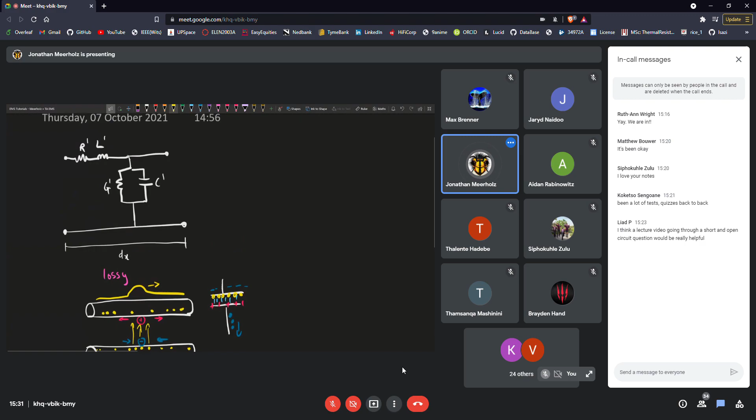Yes, we can. Okay, so there's an interaction between the two wires, which is an electric field, which is kind of exactly what a capacitor does. If you have two conductors like this, a capacitor is a storage of electrons. On the one side, it will become very negative. And on the other side, this will repel away the electrons, so this side will become positive. So that's what happens in a transmission line, and that's what this capacitor describes, that sort of behavior.

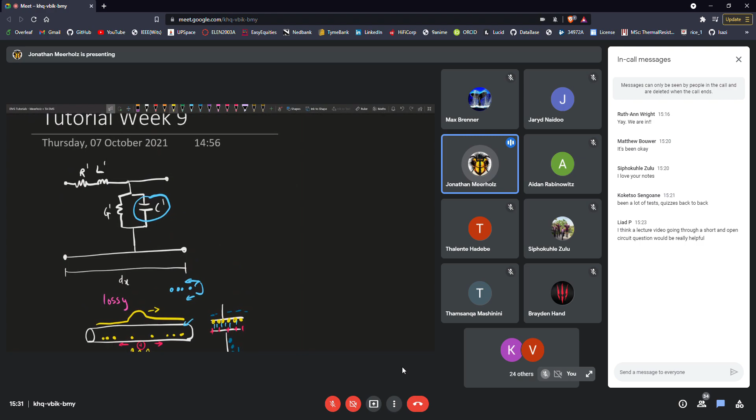When the electrons are moving, they'll make a magnetic field that opposes it. And the degree to which that happens is governed by an inductance. Okay. Then we also have a loss.

Wait, sorry, there's lots of people being noisy and calling dogs.

We have a loss, just normal losses of conductors. When electrons are traveling, they encounter resistance and dissipate heat like this. Some heat's coming off. That's what this resistor signifies. And then there's this conductance, the G, which is kind of like if you have a dielectric. A dielectric is just something that separates.

It's like insulated in a way. So it's the opposite of a conductor, but it actually polarizes. So it becomes positive and negative, and that has an effect on the electric field. Now, if your dielectric's not perfect, what will actually happen is that you'll get a loss with the electric field

as it travels. Okay, so should I get a photo of an actual transmission line? Maybe I should do that. Well, no, we don't even need a photo. If you see even in your normal twisted cables, like earphones, you'll see there's kind of stuff in between it. That's kind of a dielectric. But in power cables, it's way more prominent.

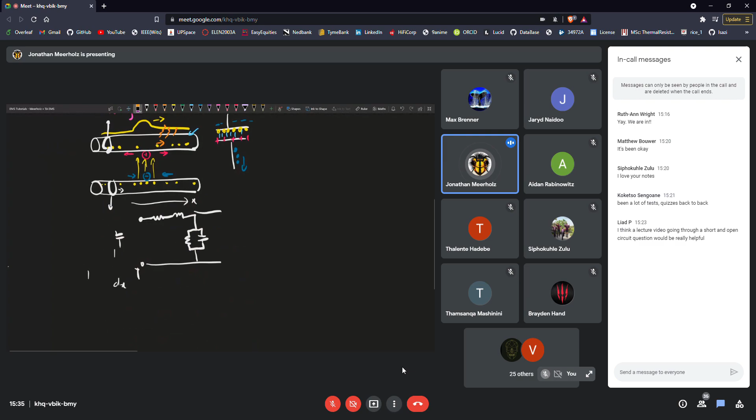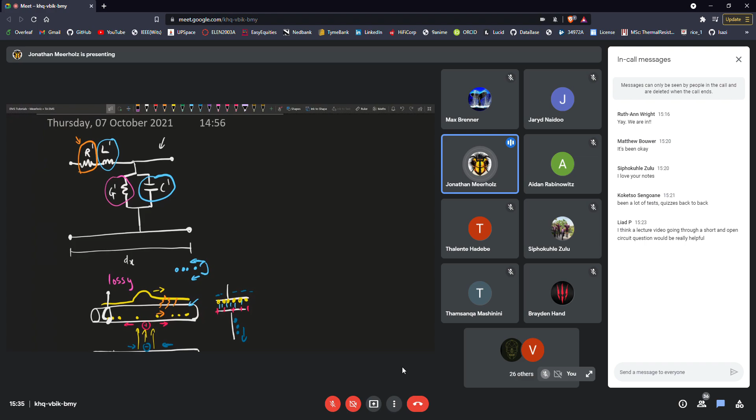So let me just slow down because I've said a whole lot of things really quickly here. Are we all okay with the concepts of what the circuit is representing? Can we see that it's also an infinitesimal length? So when I say R dash, that means the resistance

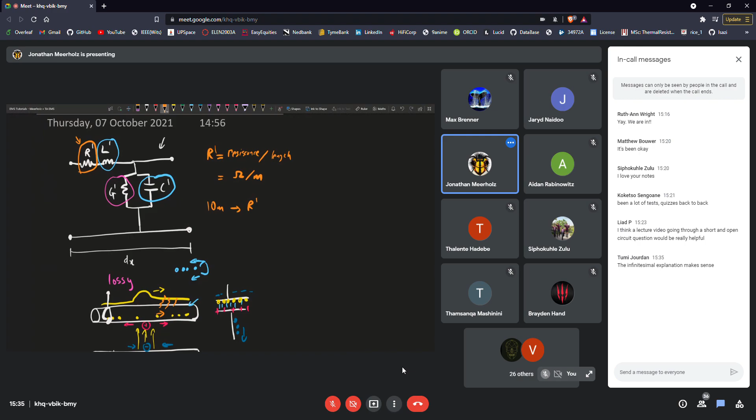So it's like a metric that you give to a transmission line. If your transmission line is 10 meters long, and the R dash is, let's say, 10 ohms per meter, then your total resistance will be 100 ohms. So in the equivalent circuit, you're actually dealing with the per length measurement. So that's the infinitesimal thing.

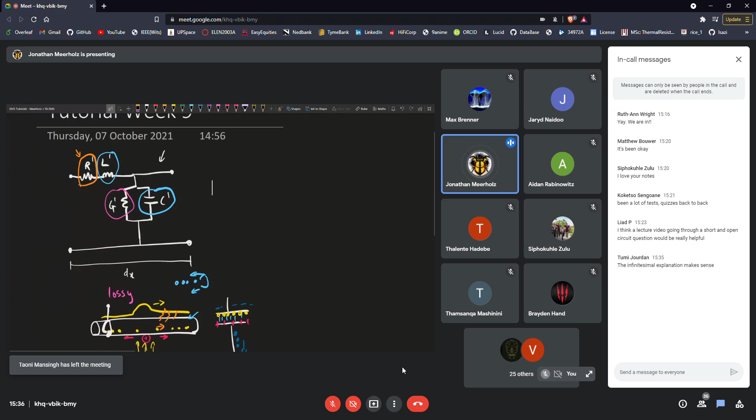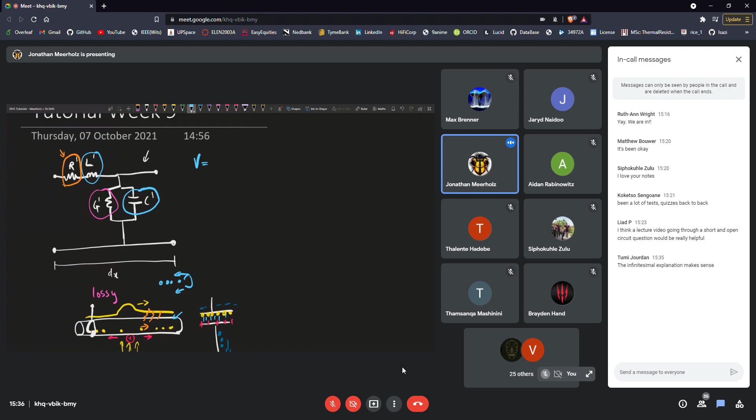So now when you piece lots of them together, basically in normal circuits we have no understanding of spatial dimension. We don't explain anything over space. There's no propagation speed. We do, however, have V is equal to L di/dt, and I is equal to C dv/dt.

These are the equations for an inductor and a capacitor, and they give us a time relationship. If you just had a normal resistive circuit, a voltage source and a resistor, and we graph voltage over time, you'd see that it would stay a constant height.

It wouldn't change. But if instead of a resistor we have a capacitor, well, let's put a resistor with it so you get a little RC circuit, and you solve the differential equation. For voltage, it's going to store voltage, so it's going to increase like this, and the current will do kind of the reverse. That'll be the current.

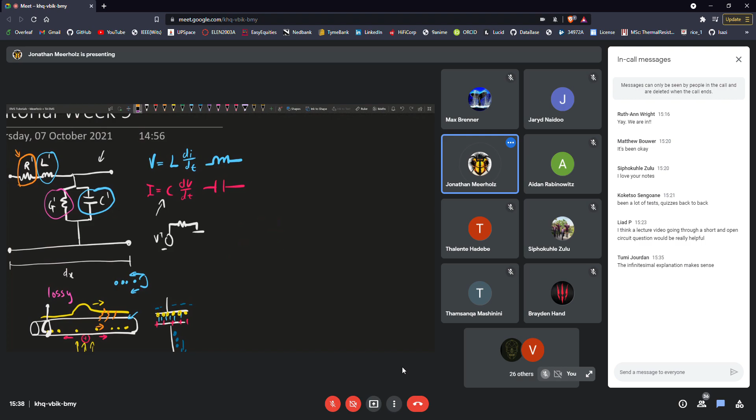So in time, current and voltage change because of these derivatives. But there's no understanding of distance. There's no length, no propagation speed, but there is a transient behavior. But now by explaining that we have an infinitesimal piece, we can actually integrate that over length.

So now we have sort of a length, and we have transient behavior happening along that length. Now suddenly, because things are changing in time and in distance, we actually get a propagation speed. So we have one little small circuit here; the change across here takes time, and it will then change to the next one, which will also take time, and to the next one, which will take time. And thus we have propagation down this line.

So that's the whole point of this section: in circuits there's no propagation speed, we assume it to be instantaneous. It's one of the assumptions of circuit theory, because circuit theory is actually an approximation, even though you've never considered it, but it's a very useful approximation where you just say that things bounce around and become stable. Now we're actually going to say that things take time to travel. And that's what this reflection diagram you've been seeing is explaining, the transient behavior. You will not get that from circuit theory by itself without considering the traveling electromagnetic wave.

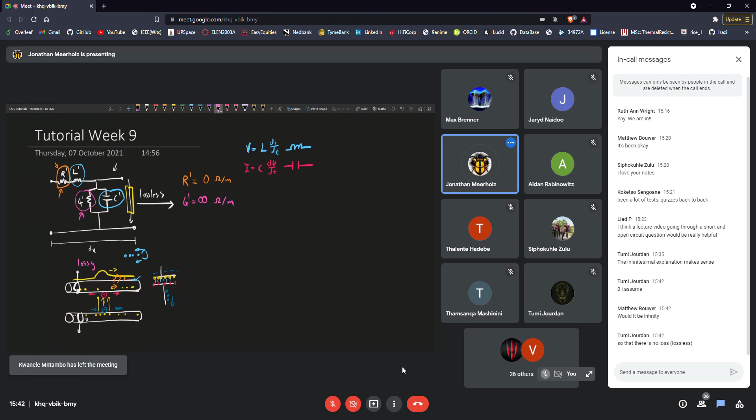If we have a circuit like this, we're just going to do the capacitor and the resistor. Remember, if current is flowing through this branch, that's considered a loss, if we have an insulator and current is actually flowing through it. Yes, you were wrong, but it is such an easy mistake to make. And you'll see in the equations that they say G prime is equal to 0. But what they're actually speaking about is Siemens per meter, because remember, that's the conductance. If you go 1 over R, which in the units is 1 over ohm, then you get Siemens.

So then that must go to 0. The conductance must go to 0. Okay, the actual value, if they ask what is the value in ohms, it must go to infinity. The reason why is because if it's infinity, what do we have? We have an open circuit. Nothing can flow. There can be no loss.

You want energy to propagate down the line, not through the dielectric. It's just a symbol, so it's not the classical sort of resistor that you use on your board, but it's that sort of concept. Okay, so that's something I really wanted to point out, so you guys don't get confused. If they're asking ohms, infinity. If they ask for Siemens, 0 to make it lossless.

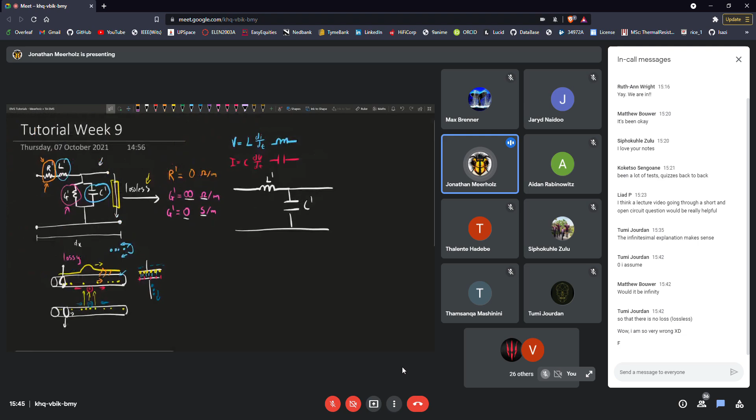Does that make sense? That means we get left with this. We just get our time variation components for a lossless one. There's no loss. Then we just have a C per length, and then an inductance per length. And this is our lossless transmission line. Okay, so there we go. That was the start. That's how you get your lossless one.

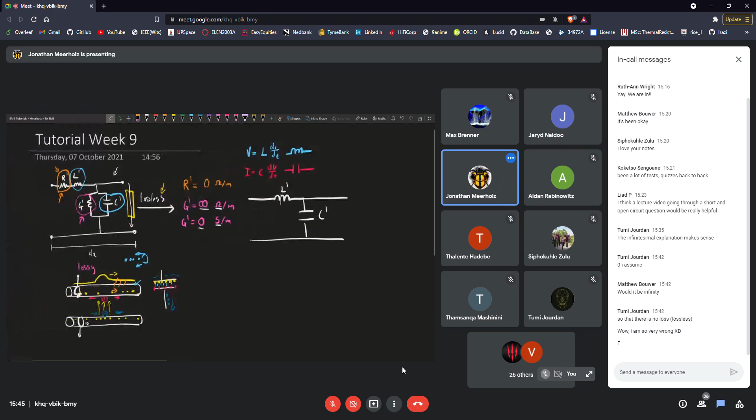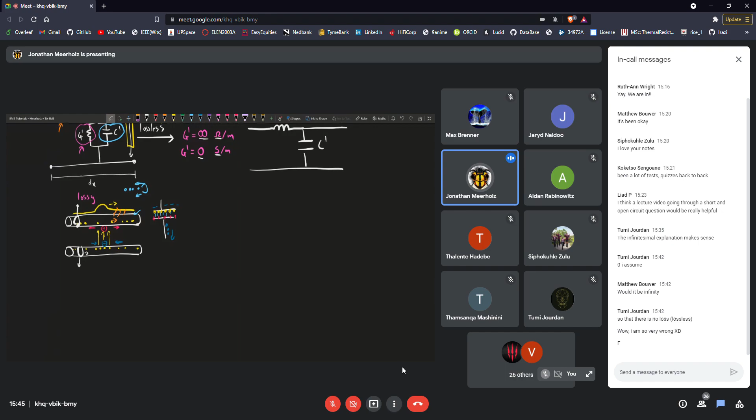But I don't continue explaining, but it's already like quarter to, and we haven't even started. But quickly, sorry, I'm babbling, but are there any questions on this? I'm going to briefly pause for you guys to ask. Let's see. Okay. Are we in understanding? I'm going to assume understanding. Quickly ask. Okay. So there we go.

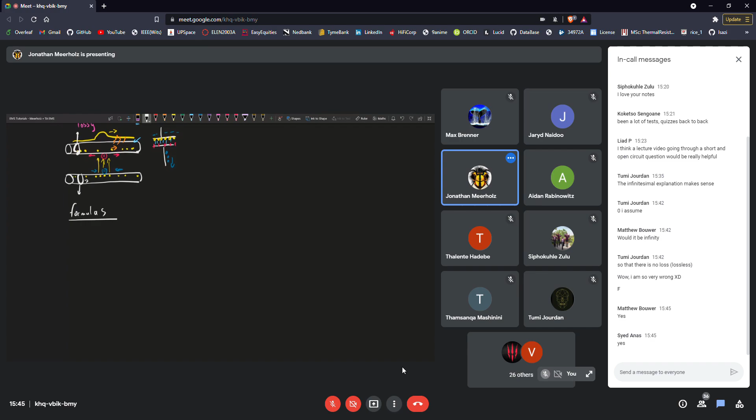Now, we're going to look at our equations. We're going to start with characteristic impedance, which they give with a Z. Okay, let's give this a context. Did you see over here that there was a sort of squishiness? How much capacitance you had, and then there was kind of a resistance with the magnetic field time delay with the inductance. Those two things, inductance and capacitance, combine variation over the distance. Remember, this is dx.

With these things, can you see that one is saying voltage, one is saying current, and they're kind of the derivatives of the other. If you go down the path of actually deriving like they do in the slides, or check the appendix of my master's, you'll see that this makes a wave equation, which shows that the change in the one creates a disturbance that can propagate when you integrate it over the distance. But that change is very dependent on how large these variables are.

So between the two of them, there'll be kind of a bias towards maybe a higher voltage ratio than current ratio. And it turns out that there is actually a constant ratio. And that ratio is called the impedance, and we call it the characteristic impedance. Here I've just put in a 0. You can have Z1 or Z2 if there's multiple transmission lines, but the main thing is that this is an impedance describing the ratio of voltage and current, the same way a resistor has an impedance, also in ohms. So this is actually measured in ohms.

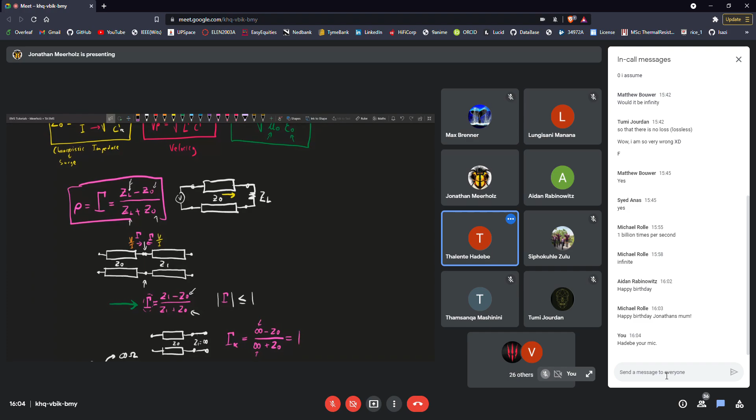So I have a question, but you might cover it next. Are you going to do an example with this? Of the reflection, like I promised. Yes, that's exactly what I'm doing. I'm so sorry. You guys have gone through all of this stuff. You're like, oh my goodness, please can you get to this practical example that you promised? It's already 4 o'clock. So let's do it. Let's start with the basic one.

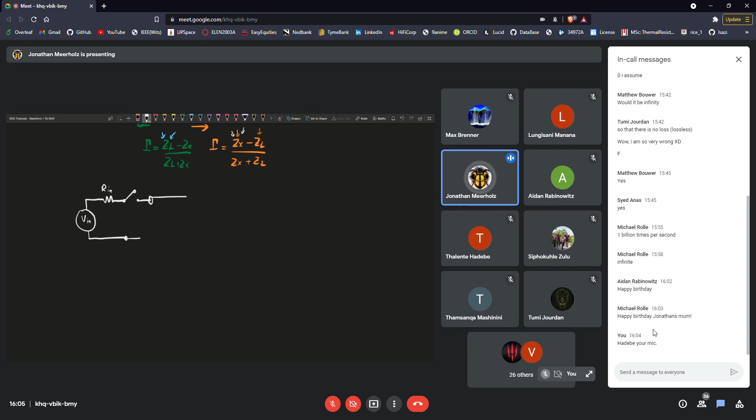We're going to have a voltage. We're going to have some sort of input resistance of this source. So this is a voltage source. This could be perhaps a CPU. This could be a voltage station. And it will have some sort of impedance associated to it. Let's say we have a switch, and we connect it to a significantly long electromagnetic conducting structure, which is a transmission line. So there's going to be a time delay.

We can describe how long it will travel based on the per length values. So if I tell you that the whole resistance of the line, I measure from here to here, is 100 ohms, and I tell you that the length is, let's say, 50 meters, that would mean that R' is equal to 100 over 50, and you would get 2 ohms per meter, not 100 in your calculation. If you want to calculate the speed of propagation, you use per distance, not the total recorded one. Watch out for that, please.

So again, just continue, and we want to see what happens in this sort of system when, let's say, it gets to some sort of load. And we'll say that this has a characteristic impedance of Z0.

Wait, let me just close my door.

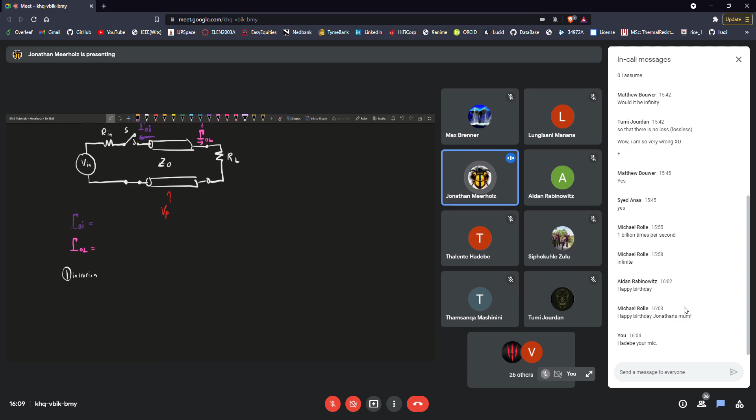Okay, so when we close the switch, we're drawing these wires here because we're saying the propagation is not significant enough. Okay, it's just small. We can just do normal circuit theory. Then it's going to encounter a structure at these two terminals, a structure that is going to enforce a certain ratio of voltage and current in the exact same way that a resistor does.

So what circuit theory actually does, all the rules you know as circuit theory are actually things that are satisfying boundary conditions of how you can make a certain current and voltage flow through certain things. So if there's two resistors in series, what you're ensuring by the voltage drop across those two things is the total current in that loop. Let's say that there is a resistor here. Let's say there's another resistor here.

When you do your calculations, you're ensuring that this current and the voltage drops all allow for the ratio that they equivalently define, if you know what I mean. So you're going to put a voltage here so that the current, we know that the current has to be the same. We'll say this is Vin, and we're going to deal with circuit theory.

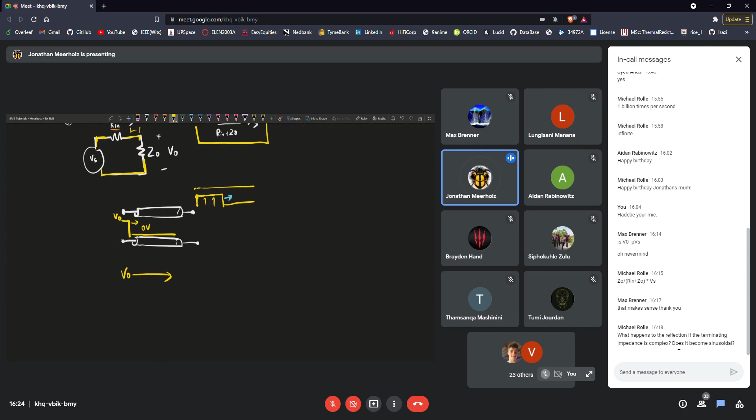We have a traveling step, a traveling wave, that's going to move down the string. The same thing is happening now on our transmission line. We have V naught moving down the transmission line. We can actually say in what time period that will happen. So we know, for example, that this will have a certain velocity, which will be the square root of the... per length, things like this.

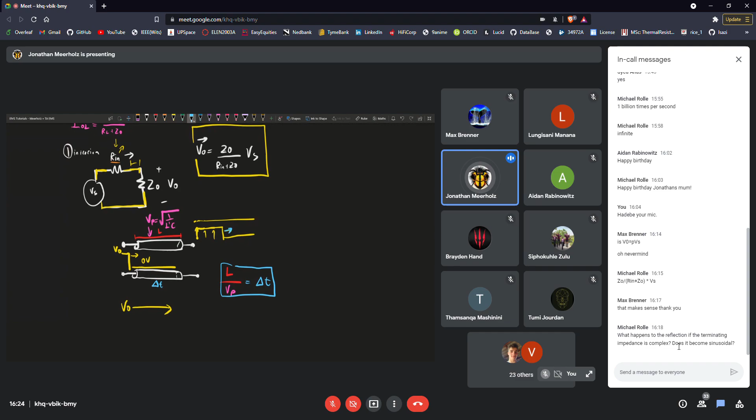We also know that this has a physical length. So then we could know that length divided by velocity will give us a time. Is it meters divided by meters per second? Yes. And that will give us a time delay. So we all know that there'll be a certain time delay for the signal to reach the end. We can call that delta t.

So if we were to graph in time, let's just draw this on the side here. We're going to draw two graphs. We're going to draw a measure of voltage at the input of the transmission line, and voltage at the load. And then we're going to put little sections on it, like delta t. We're going to speak about it in terms of how long it takes for a signal to get to the end of the line, and we'll say 2 delta t, 3 delta t.

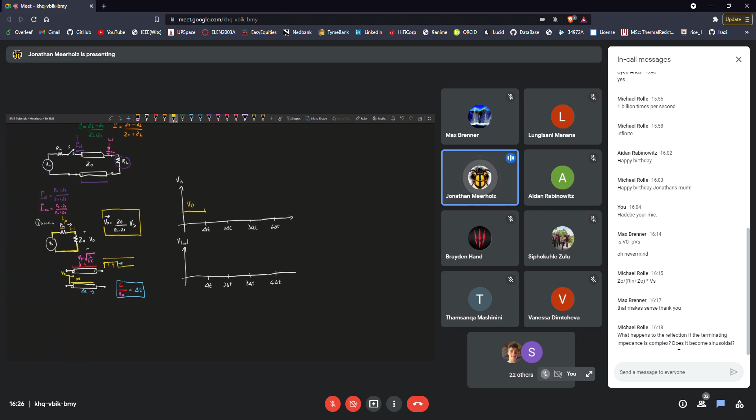So in transmission lines, you'll see this a lot. They speak about delta t's because it depends on how fast things move. So that's more important than actual time, because you'll see all your key events happen at these specific times. So V in, at time equals 0, we have V naught. Now a wave will travel, and then it will reach the load at this time. The input will know nothing about that. The input will only change when a reflected wave comes back.

So it will take 1 delta t to move down the line, then 1 delta t to move back. So the input won't change; it will still be V naught. Only once it arrives, you'll get a reflected wave that will be added on top of this. And the value of that would be the reflection coefficient of the load times V naught. But there's actually two reflections happening here. Let's come back to this. We're going to populate this graph, but just to give you an idea that things are taking time.

Also, the load would be 0 only until the wave reaches there. It's going to be 0, and then it's going to step up to a certain value. And that's what our reflection diagrams are going to show us. So let's draw it like this. We're going to use a handy little diagram called the reflection diagram. Let's draw what is happening over distance now, not time. This was over time; here we're going to do it over distance.

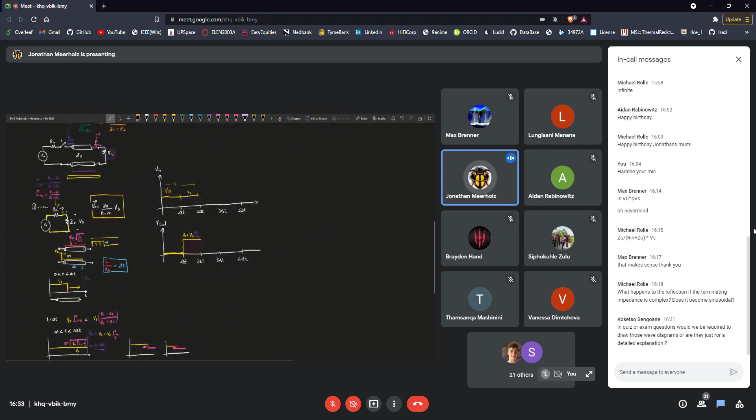You can get asked it really, and it's not actually hard. You'll see that's not hard. Now we're in the initial hard phases where we're moving through the mud. It's a bit confusing, but you'll see when we actually get to our final structure of the reflection diagram, this stuff is a joke. It's really easy. Okay, so now let's continue.

First, are there any questions? Just type them out. I'm going to continue anyway, but just type them because I'm going so far over time. But I think it's useful.

So remember, this was for the time after the first reflection. The first reflection was at delta t, and we know it's going to be less than the second time, because that will happen when this wave reaches here. That will be 2 delta t, because it was 1 delta t there, 1 delta t back. So after 2 delta t it will be back at the input.

Okay, so let's see what happens. We have this wave. Let's draw what's going to happen now, just at the point where t is equal to 2 delta t. So at t equal to 2 delta t, what's going to happen is this wave.

I should actually get my masters out so you guys can check this, because I have a really good diagram of this. This wave, which was here, has actually traveled. So it's traveled, and now it's hit another reflection, the impedance mismatch, and it's going to reflect as it did over here and created one reflection. Now this actual traveling wave is going to reflect.

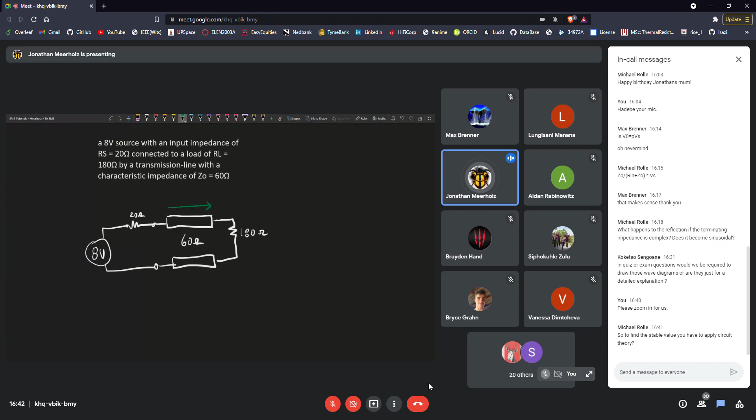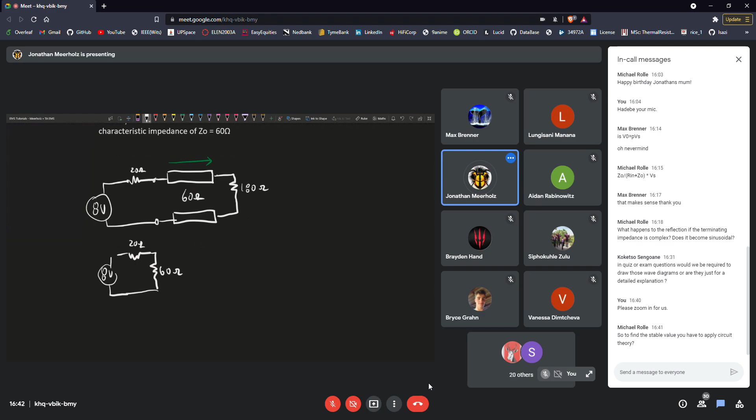So you initiate it first by doing, if we have 20 ohms, and then here we have 60 ohms, and 8 volts, we'll see that our V0 is equal to 8 times 60 over 80, so it'll be like 6 volts. I think I did that very fast, probably wrong. 6 volts will go, then it will reach the end.

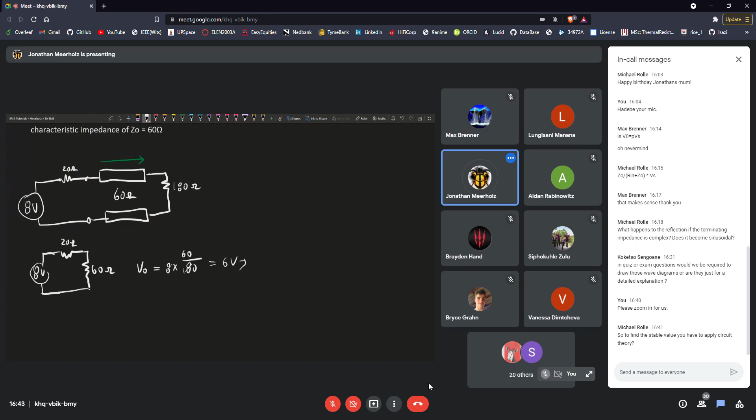Let's see what the first reflection coefficient would be. Let's just call this from A to B. If we label this A and this B, so it's coming from A to B like that. We'll say reflection AB is equal to where it's going, the load, which is 180, minus where it's coming from, the transmission line, which is 60, over 180 plus 60. That's equal to 120 over 240, which is equal to 0.5.

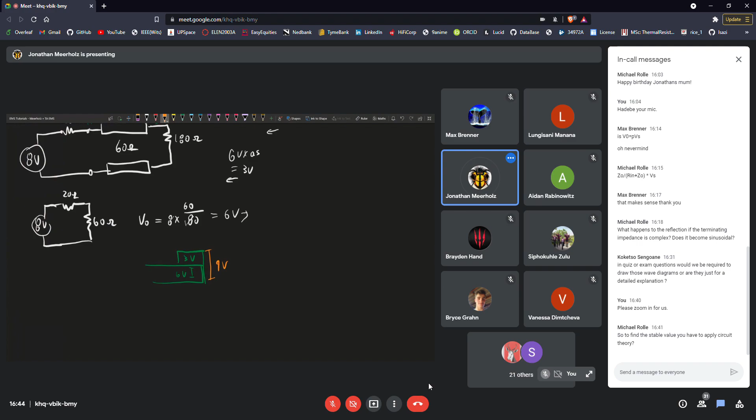Okay, so then what will happen is that you'll get 3 volts coming back, because we have the initial volts, which is 6, times 0.5, which will give us 3 volts. So that means we had that traveling one that came, 6 volts. Then we have a reflected one that came back, 3 volts. So then the total voltage at that time was 9 volts. Okay, so if we go back, if I did that right, you see, I do that calculation.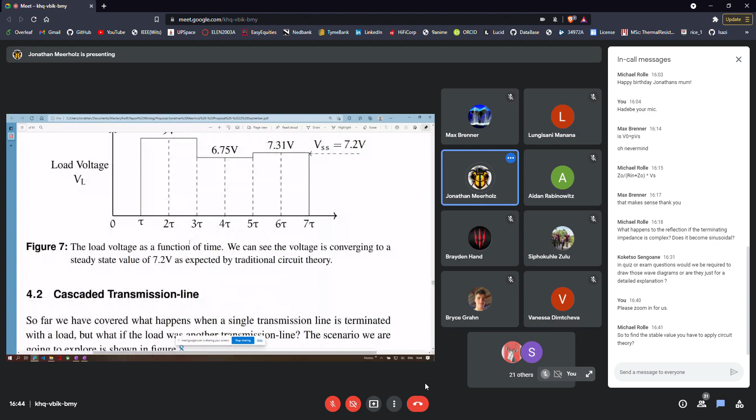So then that means at τ, you see I use the same sort of notation. This is standard notation. As it arrives, we get 9 volts, the combination of the incident voltage and the reflected voltage. If you look at the reflection diagram, you can see that the voltage at τ is the combination of the incident voltage plus this. Can you see at this point it's 2 of those things? And that will become the DC on the line.

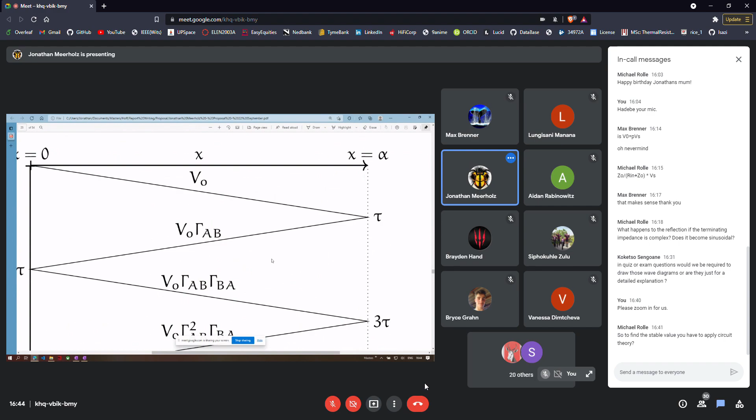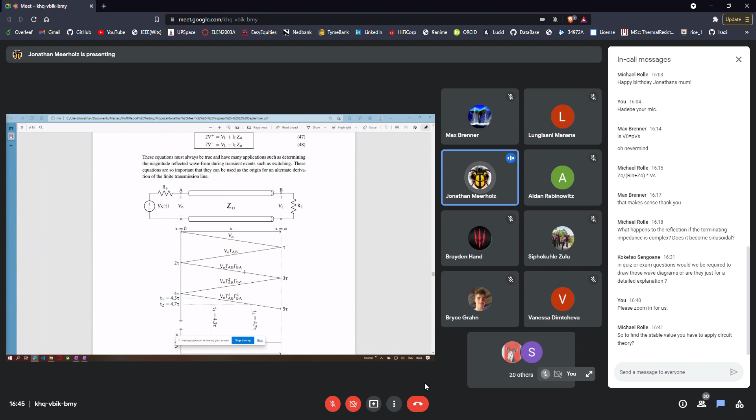Okay, well, I haven't even seen if there are any questions. "Please zoom in." Oh my goodness, sorry, man. Shit. When I changed the window, I couldn't see the chat.

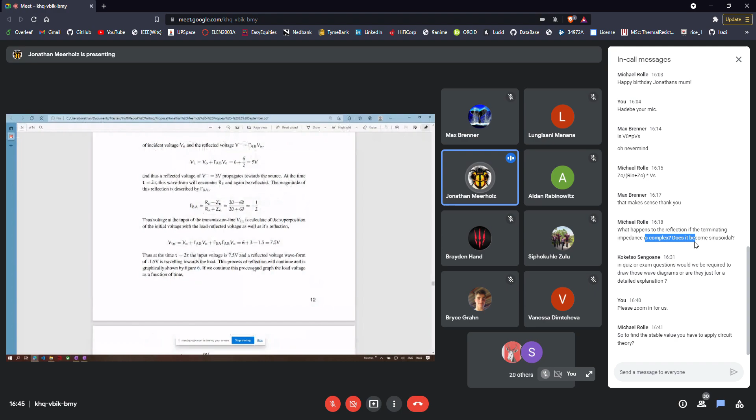So to find the stable value, you have to apply circuit theory. Yeah, so the circuit theory will give you it. So when we do this process, eventually, that's what I wanted to try to show you. If you carry on, oh no, I'm going on the wrong place. If you carry on doing this process of adding up the waves, like what I was showing here, you can see that over here there are portions where it was negative, so it's going under and over and under and over, and eventually, can you see, it was 7.3, it's getting close to 7.2.

If you go back here and we actually do this scenario that I was showing you, where there's a 20 ohm and a 180 ohm, let's just draw it as if we don't consider the transmission line. Let's say all the reflections have happened. Let's just do normal circuit. So this was the initiation, just don't get confused. Now we're going to draw the circuit. Do circuit theory, this is 20 ohms, this is 180 ohms. What's cool is, let's find what is actually the voltage.

You get 8 volts times 180 over 200. So that's 180 plus 20. And if I just do that on my calculator quick, 180 divided by 200 times 8, we get 7.2 volts. This is what this thing does.

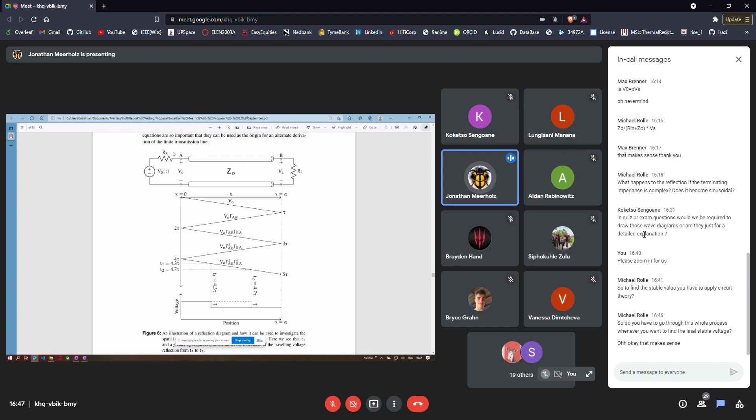It's basically saying each time this thing reflects, it's enforcing its condition. Basically the source resistors are enforcing a condition. The source and the load are both enforcing this condition. They're both communicating to each other what they want. And it will travel, and it says, no, I can't do that. So it does a reflection. That's the excess energy, the reflection. It reflects. You add. Then that is actually where they both agree.

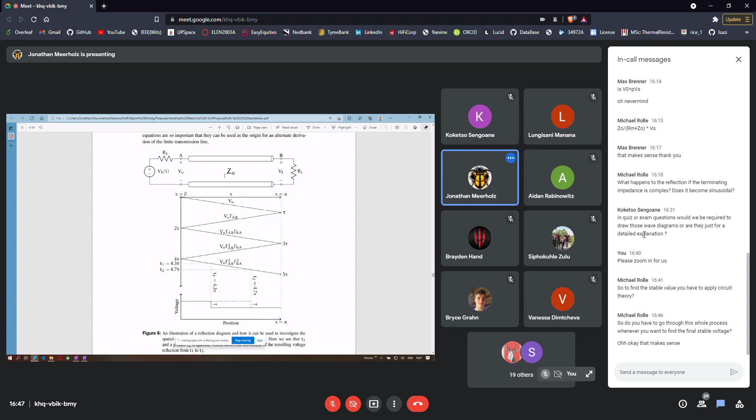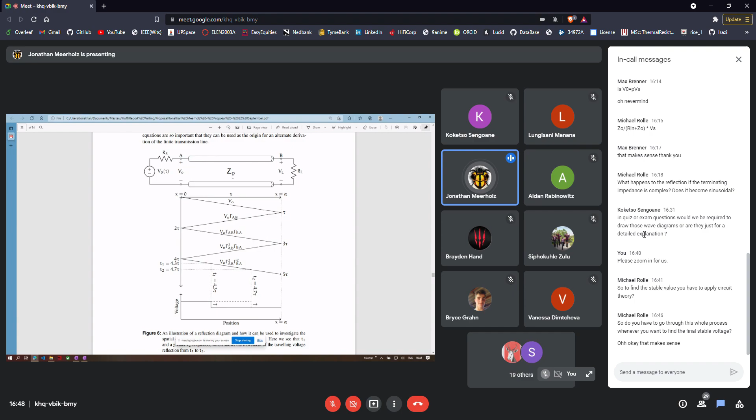Circuit theory is the point where everyone's agreeing. It hasn't gone through the process of fluctuating between not agreeing, because they're not actually directly connected. It takes time for them to communicate, for the mismatch to settle. And this is how it settles. This is the whole point of transmission line theory, to show this settling procedure.

So the final thing that I want to show is this diagram. If we just draw this basic circuit again very quickly, and I'm going to just extend it like this. Let's just zoom in a bit. We can draw this amazing thing called a reflection diagram. Let's just make this a bit bigger.

Oh my goodness, just erase everything. Shame, everyone's probably thinking, what is going on? Why are we taking so long? So I'm just trying to go a bit faster.

What we can actually do is draw this thing called a reflection diagram. I like to draw it down like this. You can draw it with the vertical axis pointing up; I like to point it down. We're going to label this x, and this time. We're going to label this one what we were labeling it before, ΓL, the reflection coefficient when it arrives here, and the reflection coefficient when it arrives here, ΓS. Let's say we have an incident voltage that we got from that divider.

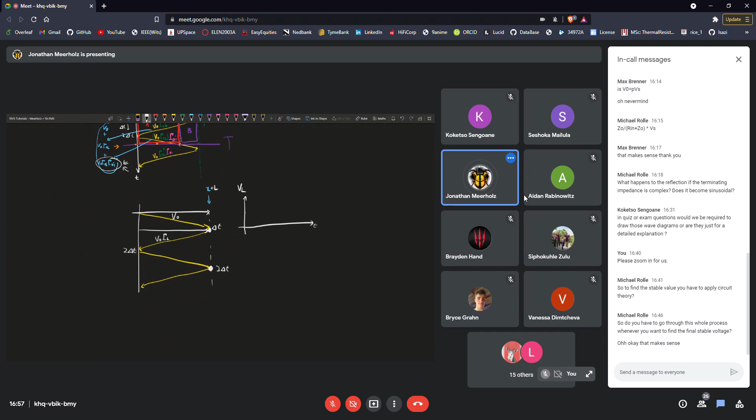This will be V naught gamma load gamma source. So obviously this is the reflection for the source. This is a reflection for the load. And if we mark this as delta t's, we speak about delta t's because that's when your events are happening. We'll say 3 delta t. And what we notice here is that actually every second delta t there's a change.

That's because, come on, why aren't you clicking? Imagine, I could erase. What's going on? Can I just delete it then? There we go.

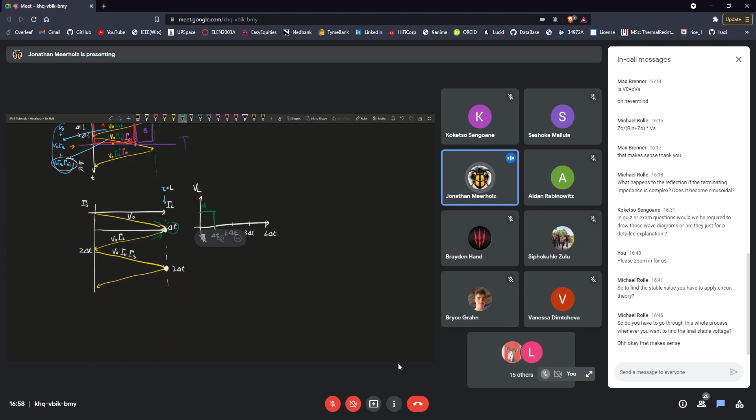Okay, and then we'll call this 4 delta t. When was our first event? That's delta t. What is its value? We can see that it's V naught and V naught gamma L. So the height at delta t is going to be V naught plus V naught gamma L. It's very small. V naught plus V naught gamma L.

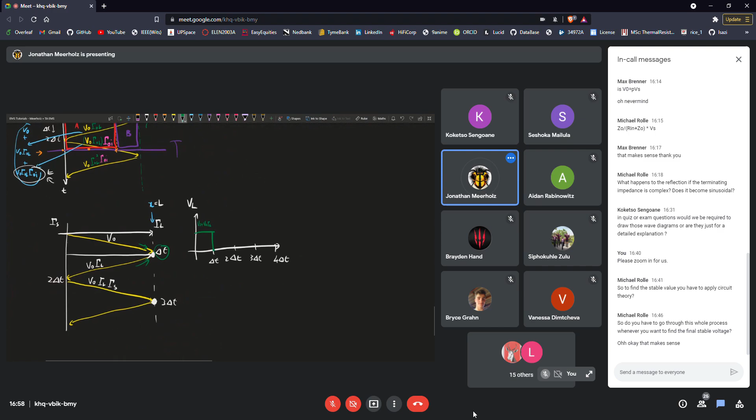And then that was going to stay the same until our next event. Our next event is at 3 delta t. We'll say that nothing's changed because no traveling wave fronts have hit this thing, so it's going to stay like this. Then at 3 delta t, it's going to have a certain value. Let's see what that value is. Let's see all the wave fronts that were on the line.

You could see what's new. So what's new is these two, so that would represent this. Or you can see the total thing, all of them, including these previous two. But those previous two were what was here. So basically all we need to consider is the new two, added to what it was.

So it would be V naught plus V naught gamma L, plus the two new ones, which is this one here, and then V naught gamma L squared gamma S. So that will be V naught plus V naught gamma L plus V naught gamma L gamma S plus V naught gamma L squared gamma S, and that will be the total height, if you include this green part over here. This green part is this part, and the orange part is that orange part. So you can investigate this thing in space or time.

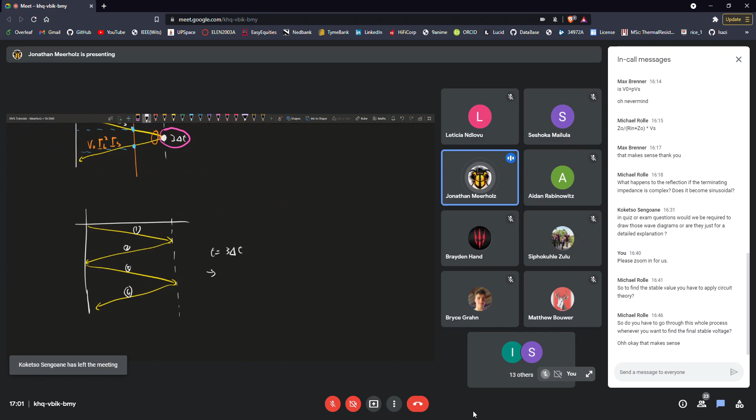I can ask you, what is the total voltage on the line at the input of the line? Or what is it at the load of the line? So at 3 delta t, if this is 1 delta t, this is 2 delta t, here would be 3 delta t over here.

I would say, what is the total voltage at the line? Let's see at the input. Okay, at the inputs over here, what we can see is that this wavefront, we're looking at everything above it. We can see that this wavefront has already hit it over here, this traveling wavefront.

So we would know that the total voltage at the line at the input, we'll say VNT at 3 delta t, is equal to: this first one will be underlined, the second one will be underlined, the third one will be underlined. So it'll be the voltages of 1 plus 2 plus 3.

Okay. If we say, not source, we'll say V load total at 3 delta T. Okay, so that's over here at the load. We can see that actually at this point at 3 delta T is the point where a new one is made. A new reflection is made.

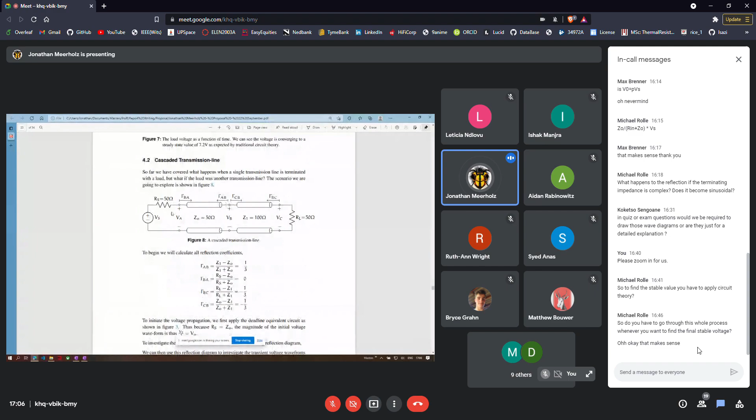So when you do two cascaded lines, as they call it, instead of it being absorbed by the load, you can actually track it. Let me show you what that would look like, and in your notes you might see something like that. This is a scenario where we have two transmission lines of two different impedances. So here's where it's very important that you understand your reflection coefficient labeling.

We have AB, which is going from A to B. So then that means it's going to Z1, coming from Z0. So there we go. And this is going back, this is from B to A.

So if you're going from B to A, you have all these different ones. So you need to know the difference between all of those things. But if you actually draw the diagram for that, this transmitted waveform, okay, so there's a transmission coefficient, but I'm not so sure how in depth you guys go into these dual sort of transmission lines.

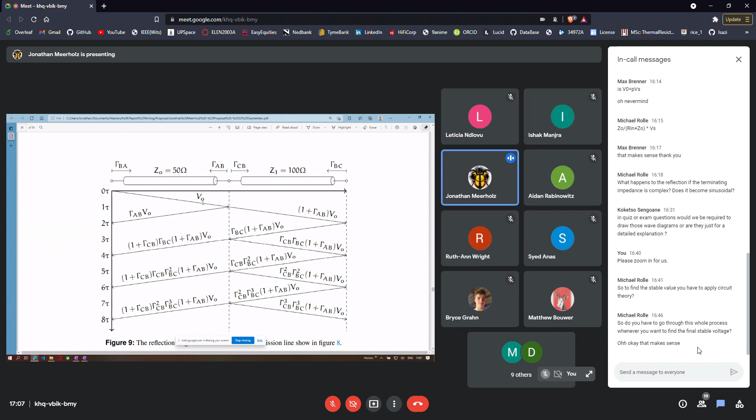But actually the transmission coefficient is 1 plus your reflection coefficient, because basically what you say is that the total voltage at this line with the reflection is what gets transmitted. So you actually add these two together, which is the same as saying 1 plus the reflection coefficient, times what was the incident wave. And then that gets transmitted through.

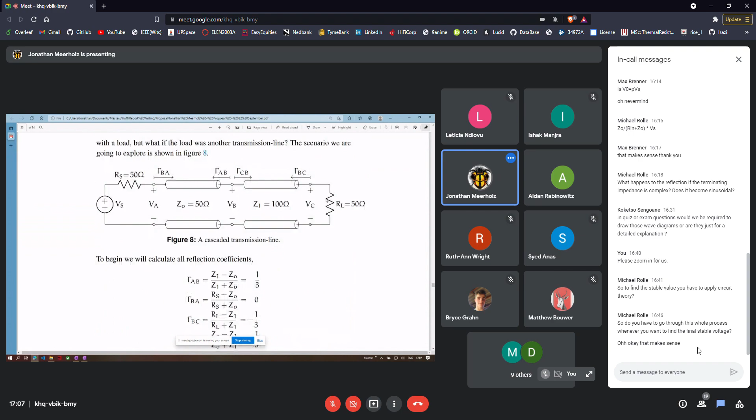So what you're saying, okay, where's the other reflections? If it's a resistor, there isn't. This amount is actually absorbed by the resistor, and then you just deal with this. But then you see in this more complicated scenario, you get one that actually will get to the end of the load, which will be something that's based on these values of Z1 and RL. And then that will get reflected back. And then at this, one will get reflected back and one will go through.

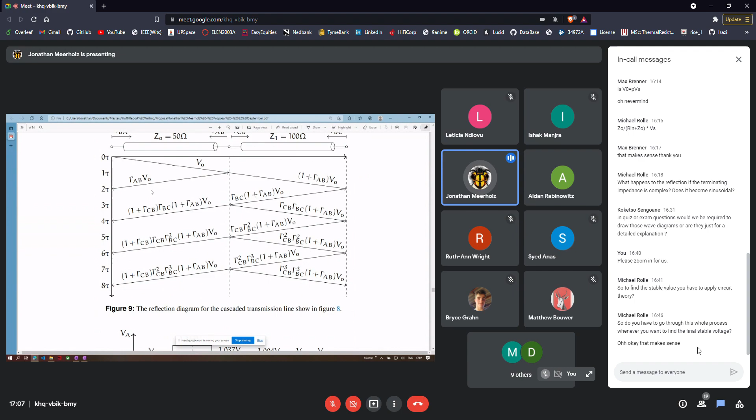And at your 4 tau there, is that impedance matching? Is that why there's no reflection? Yes, exactly. So why there's no reflections coming back on this side is because the impedance is matched. Perfect. So I just have one more question.

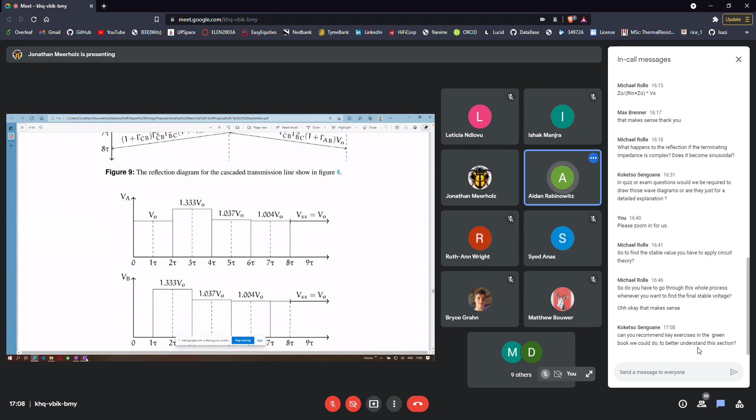Yes. So in your examples, I think that you're referring to the top half of the equivalent circuit every time, like the first, when it goes from positive to the resistor. What do you mean? So like if you just scroll up a bit there, a little bit, yeah, you could say that.

Yeah. So that one of the 8 volts, that circuit, I don't know if I'm understanding it correctly. I'm imagining that if the positive is north, then you're just going from the 8 volts through the 20 ohms, then through the A to B, then it hits the 180 ohm resistor, and then it goes back, and you're not talking about the current going through the 60 ohms at the bottom. Okay. Fantastic. Very fantastic observation that.

So now this is where you are now. What you've been shown in circuits so far is voltages and currents. And it's very good. You're trying to understand this thing from what you know, and you're like, okay, well, what's going on here? We deal with these circulating currents and whatever. So perfect. I'm very happy that you're analyzing this. You're really thinking well. However, we're in the world of traveling waves. In traveling waves, we actually look at electric and magnetic fields.

So to make that point, let's say we have 2 conductors. I don't know if you remember doing twisted pairs, where you actually couple 2 wires together. This is a similar sort of thing. When we say a voltage is traveling, remember a voltage is a distance in an electric field. There's an electric field between these 2 lines that is actually traveling. That maybe makes more sense to think about as an electric field traveling between these 2 lines.

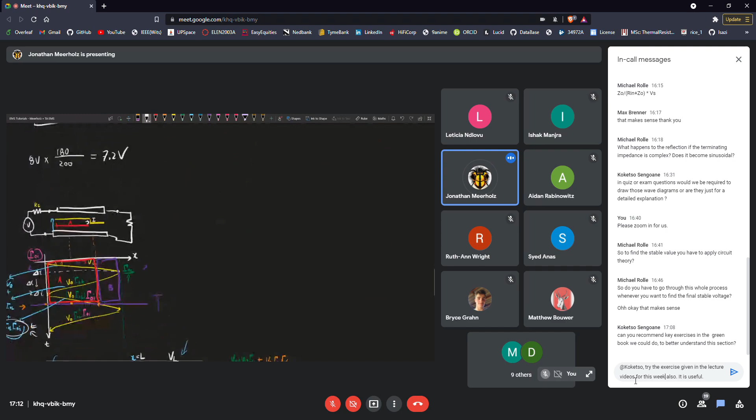So your path of travel in a circuit, let me just draw the circuit again. In the circuit like this, I just ignored the one resistor, even though it should probably be there. The path of travel with electric fields, remember it's between both of these things, like this, is actually like this, forward and back, like that. And then that's why in our diagram, we draw it only one to there and back. We don't need to have an additional movement for underneath. They happen simultaneously.

Oh, that's cool. Thank you.

So yeah, circulation, it comes back down to Maxwell. These things are amazing. If you think of things like these with these curls and stuff, you'll see you do all maths with Stokes theorem and all this stuff. This is actually what it's really all about. So think about fields. Try starting to think about fields, traveling waves. But if you just look at it as a conceptual mechanical thing, it literally becomes like this. It's like gamma B, then the next one becomes gamma AB, and then you just sum them up.

Yeah, the lecture videos are good. There is a section in the green book. I forget exactly what section it is. I'm not sure if anyone knows, but I remember it being a bit tricky-ish, the green book. So check it out. It's nice because they speak about things more in terms of Maxwell and way more deep. But I think lecture videos are a good way to go. There's lots of resources on this online. Again, my master's with the appendix, I tried to make it simple. My goal for that appendix was to explain the procedure. So that might help out for derivations if you have questions.